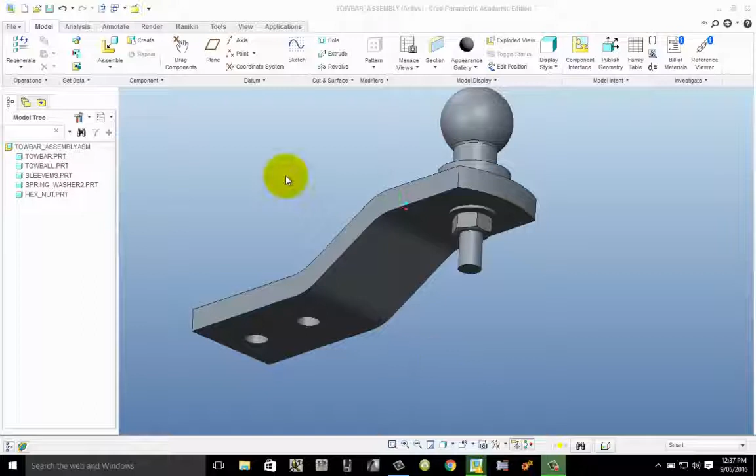So with that in mind, we can go to our assembly and follow the same procedure we normally do by bringing in the bracket. So we'll go find the bracket, there it is there, and open that.

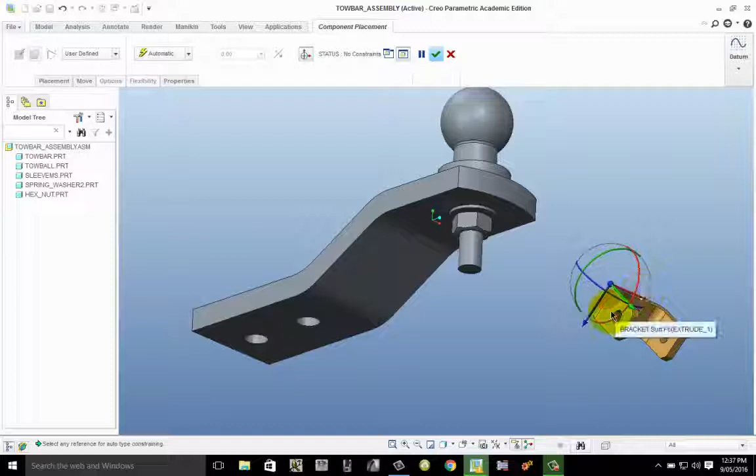It's always good practice to get your object roughly in the right sort of orientation before you start putting constraints on. So that's roughly in the right spot, so what I'll do now is select that surface and the underside, flat side of the bracket there.

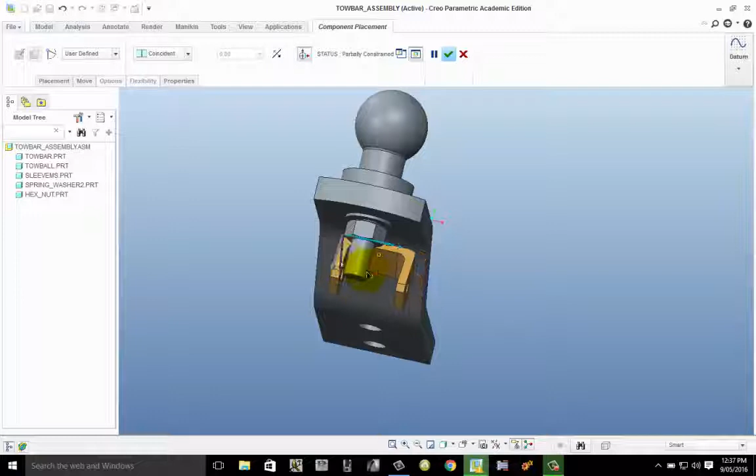It's defaulted to an angle, we don't want that, we want a coincident constraint, and we might then just use the coloured axial constraints here to bring it closer into the position we want it to be in. You can see here we can still move these around roughly into the right spot.

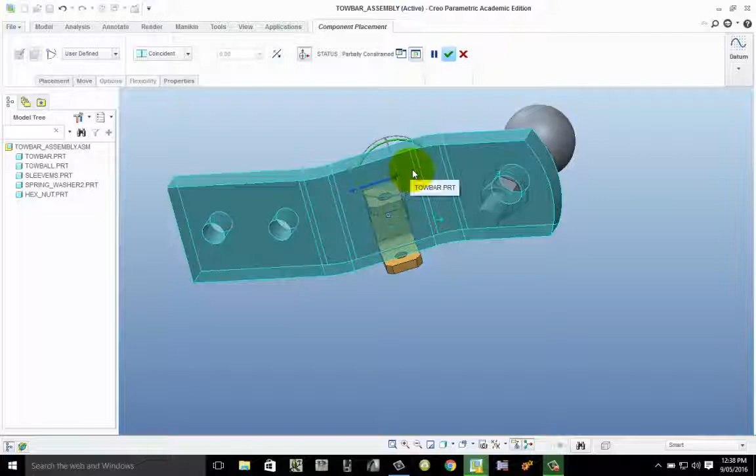So rather than just doing it roughly, let's make this precise. To make it precise, we really do need to know the distance between this edge of the curve and this edge, and make it halfway between those two points.

Then we'll make the faces out here, this tow bar face and these faces, the same distance away on both sides. So we'll do that constraint first.

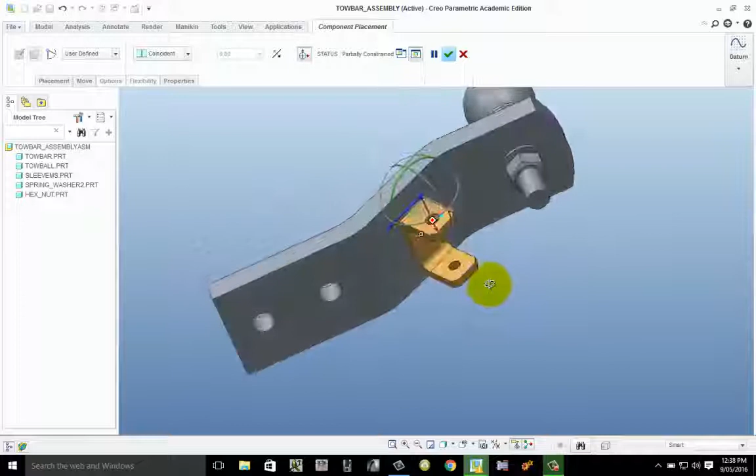So what we'll do, I'll show you how to use the analysis tool, which allows us to measure distances. So if you've forgotten, you can work it out. Up in the analysis tab here in the ribbon bar, click on analysis, come across to the measure tool, and while we're in the measure tool we can see all the different ways of measuring volumes, surface areas, you name it. The third one across is distance, so I'm just going to click on distance to activate it.

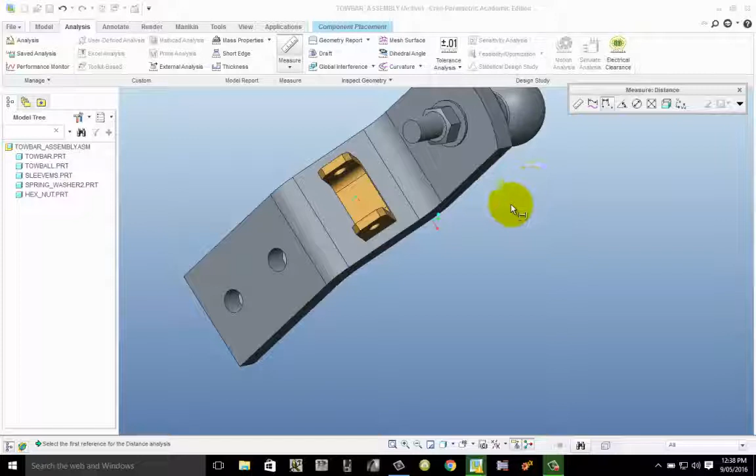If I wanted to know the distance, say from that edge there, hold down control, select the other edge, and it tells me that's exactly 75.

And then I could also do the same for the face and or the edge of the bracket. So I'll choose that edge there, hold down control once again to that edge there, that's 52.

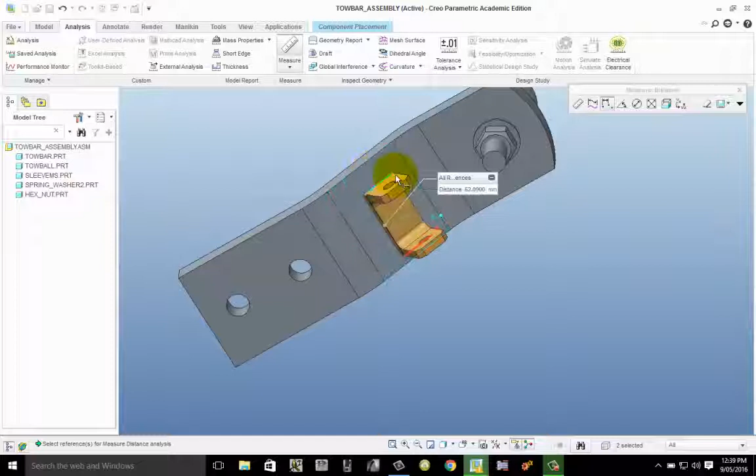So we say to ourselves, we want this to be evenly placed between, so if we take 75 minus 52, what's that, 23, and then we want an equal amount either side, so 23 divided by 2 gives me 11.5. So if I remember, I need 11.5 from that face to this face, we should be able to then constrain it to that.

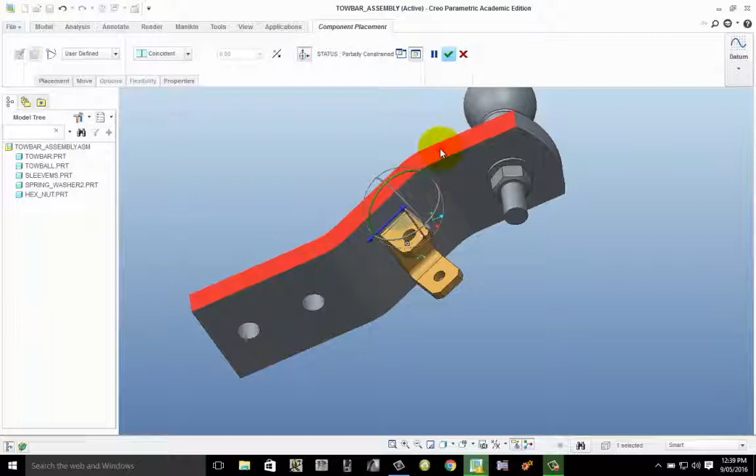Get out of the measuring tool by closing that box down, go back to the blue component placement box here. Then we can choose this outside surface here by clicking on the object once and then clicking onto the surface, and then we might zoom in a bit and see if I can get that outside surface of the...

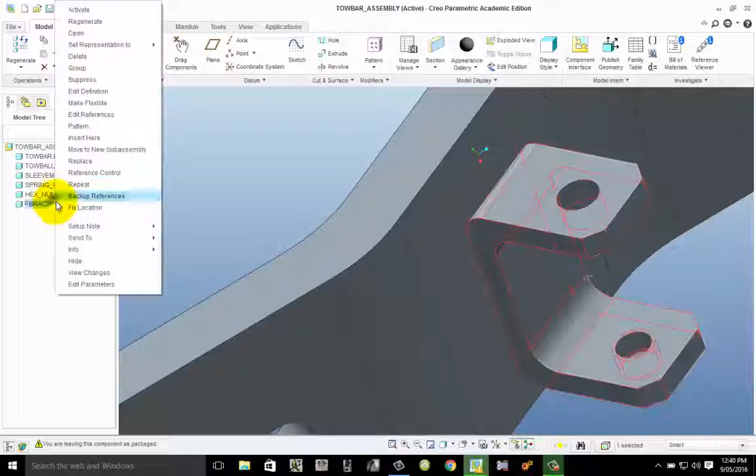That's not being very nice to me, of the bracket. I might just check out what's going on there. The stupid thing jumped out of mode again, so what I'll do, whoa, okay, it's doing something really crazy now. Let's cancel that, cancel that. A few issues with my mouse at the moment. Okay, we're back to the bracket, don't know what happened there. That was a bit bizarre.

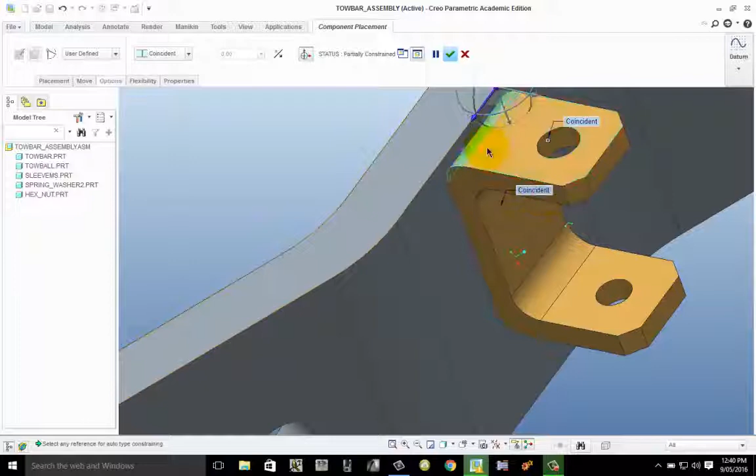Okay, so back to constraining these two faces here. Select this one, select that one, and always just, if you can, make it go in the direction you want it to go. So change it from coincident to distance, and we should be able to drag it along that axis. It's not being very nice, just keeps on defaulting to weird things. Try distance again.

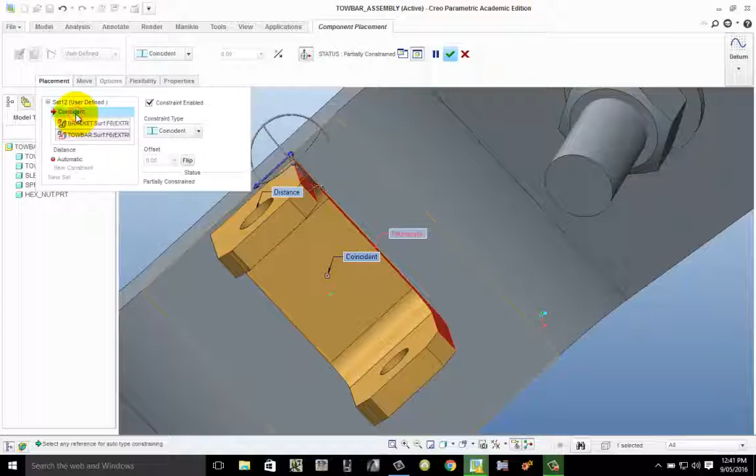Okay, that's not being very nice to us for some reason. Oh, it's lost its placement. Let me check what's going on here. There was a coincident constraint, then a distance constraint, and for some reason it put another one on. So I'm going to delete this last one by selecting it and clicking delete.

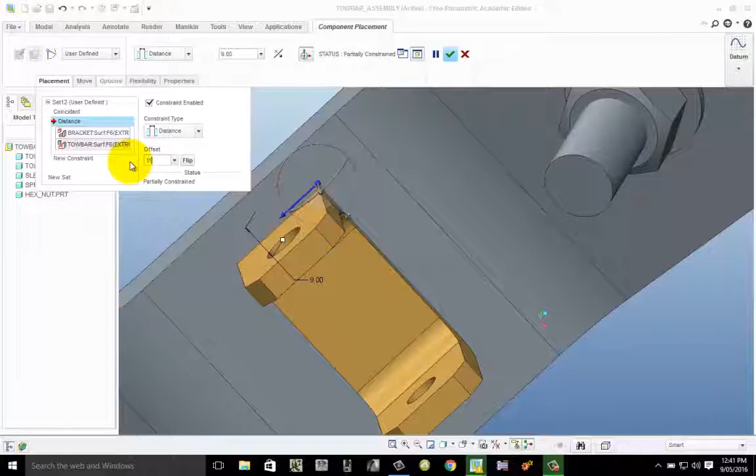Then I'm going to go back to this one. You can see here distance, there's two surfaces, and then I should be able to pull that aside, which I can. I'm going to change the distance from whatever it was to 11.5. That was a bit of a drama to do, but eventually we can now see that is mid-placed. So that's good, we like that one.

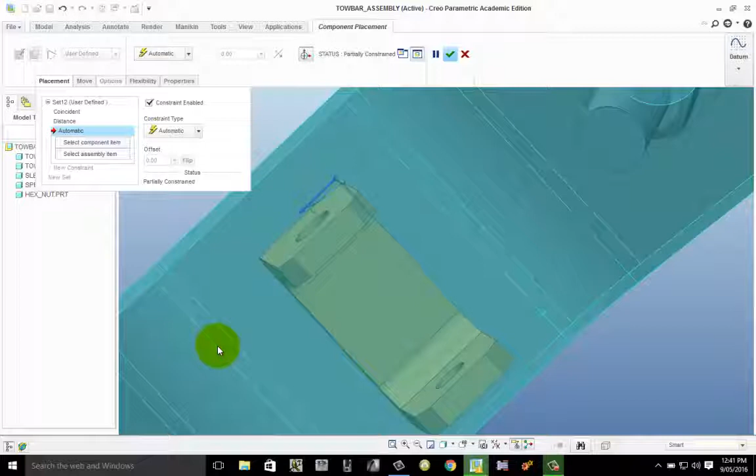So to go to the next constraint, we'll click on New Constraint. Now we need to make the distance between these two lines here, bends there and the bend there, equal distance as well. So while we're still in that process of assembly, we can go Analysis, Measure,

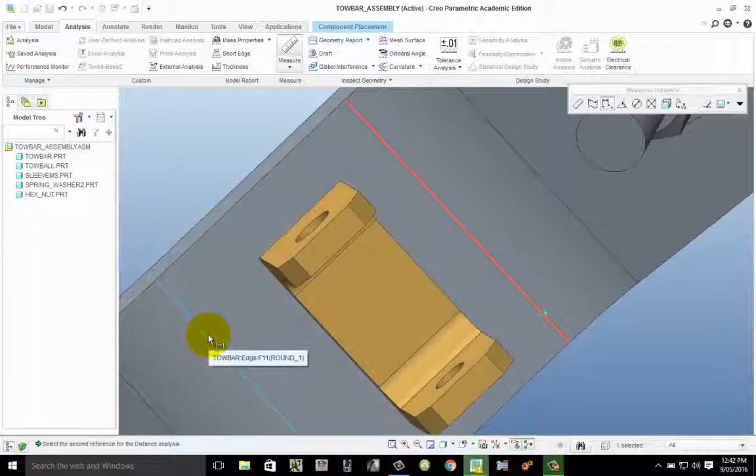Distance. I'm going to select that edge there, hold down Control, and also select that edge there. And it tells me that's roughly 58 millimeters.

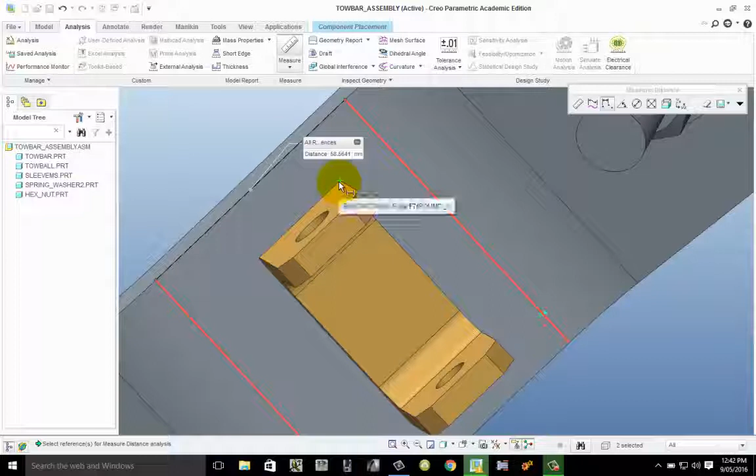So if that was 58 millimeters, and I know that the width of this bracket was 25, 58 minus 25 is 33. So if we said 33 millimeters left over, divide that by 2, that's 16 and a half. So 16 and a half millimeters then from that edge to that face there.

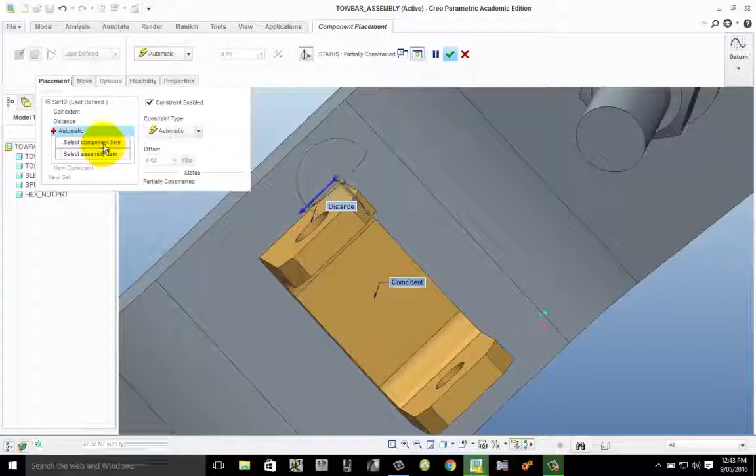So jump out of the measuring tool, close it down, and go back to our component placement mode, back to placement, make sure we see what's going on. Yes, so it's looking for some information, so what we'll do is we'll select that edge if we can. Now we'll just select the component first, might roll that over.

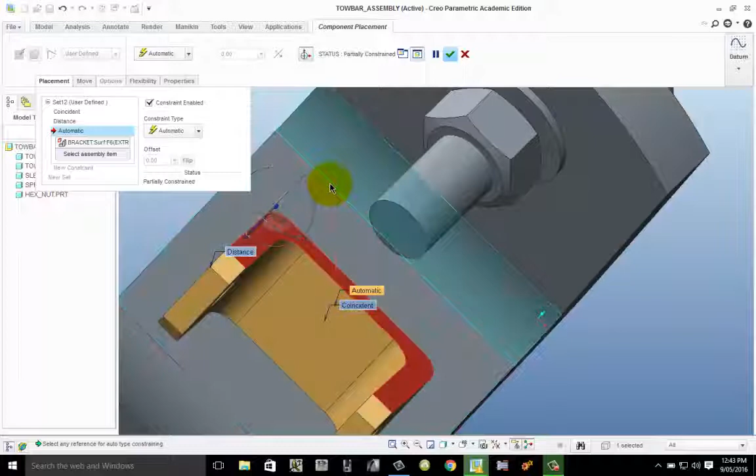That face there, you can see it's stored to. I'm going to right click until I get that edge, which I did, hold down Control - actually I shouldn't hit Control, just right click until I get the edge pre-highlighted, then left click, and you can see it's now stored it.

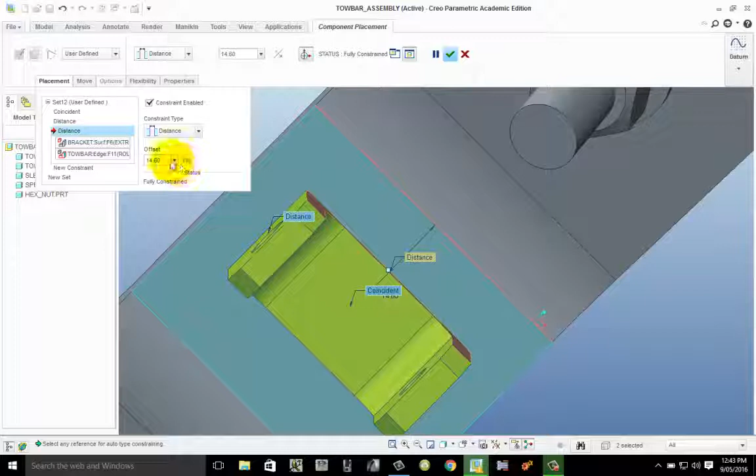Change it from coincident to distance, and then we need to offset that at a distance of, I think we said 16.5. So I'll just drag it that way so it kind of knows, and then 16.5 and enter. Let's have a look. It says fully constrained, looks like it's in the middle.

Good, we'll accept that. Oh goodness, jumped into rendering for some reason. Looks like it's still in the right spot though, which is good.

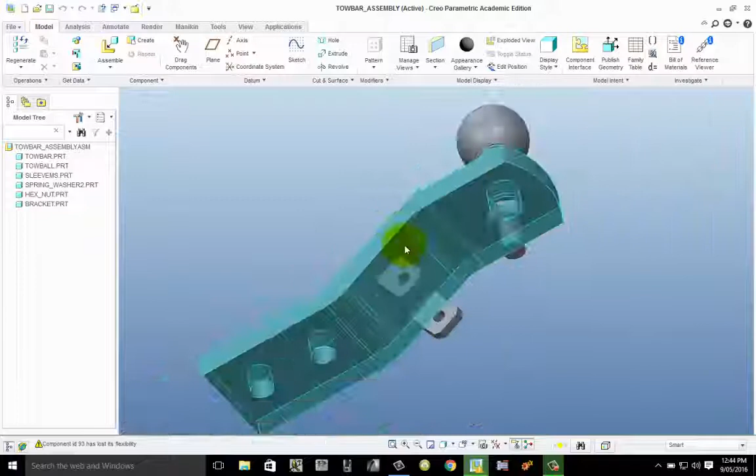And then the last thing to do is to bring in the bolt. So we'll do that by clicking on Assemble, go find the bolt, there it is there, click Open.

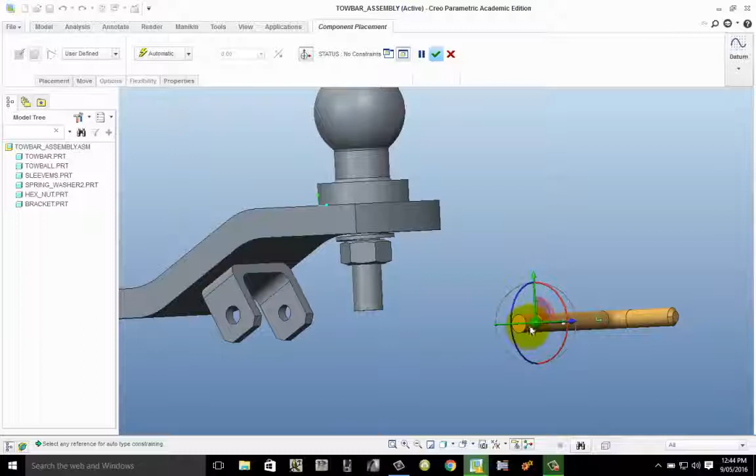What we've got to realize here is because we drew this bolt with a swept blend function, the only part we can use to really successfully assemble this is the cylindrical section on the end here. I know this is a threaded end, there's a cosmetic thread on there, and looking at my bracket I can see this is a wider hole than this one, which means this end must have the cosmetic thread on it.

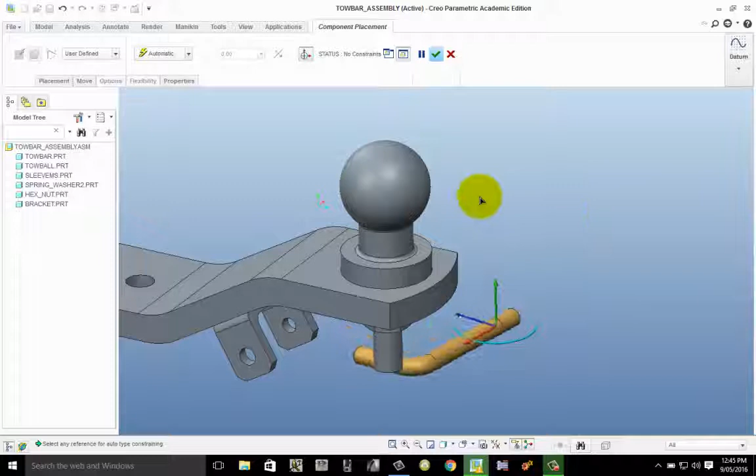If I actually hover there, you can see the blue line representing the thread. So this end is going to go to that end there. So what I might do first of all is see if I can spin this around to get it kind of in the right spot to start with. Right sort of orientation, that looks better.

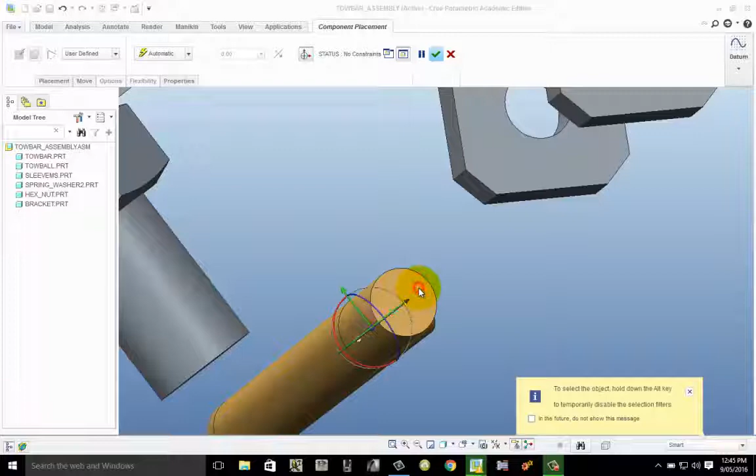And then what I might do is grab the surface on the end of the bracket, that one there, and then the surface on the end of the pin, not the bolt, sorry. Can't get that select for some reason, it's being a pain. I'll check my placements. Yeah, it should be accepting it. Try that again. There we go, eventually.

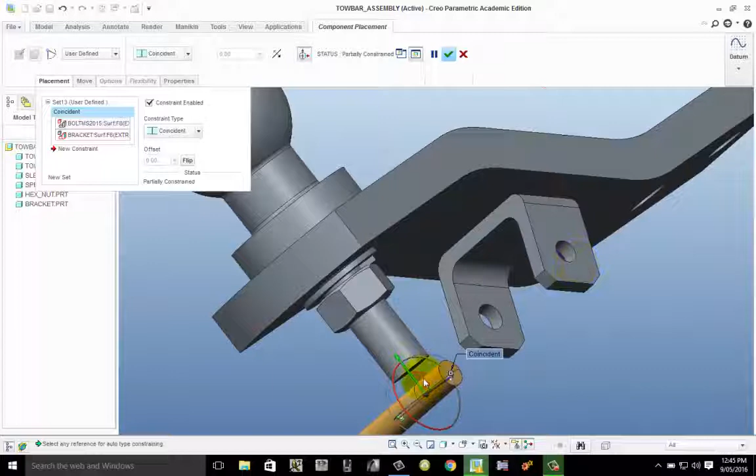Selected that one, and I want to make them coincident, which means you can see it's lined up there. And then we grab the outside cylindrical surface - or new constraint first - outside cylindrical surface there, inside cylinder there, and that's coincident as well. And it's fully constrained. Okay.

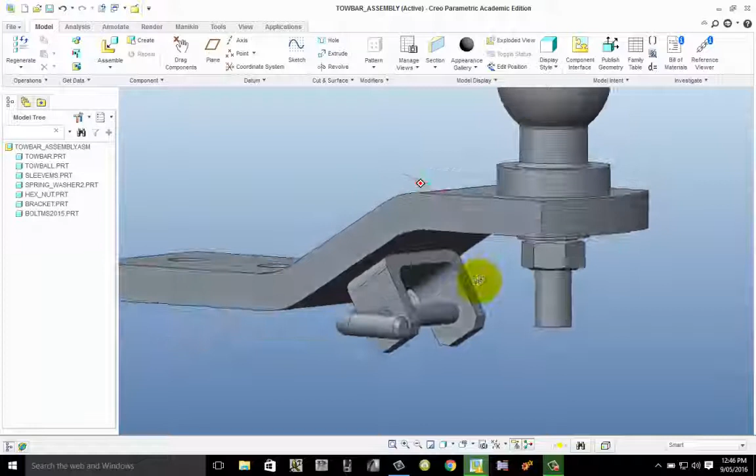Alright, so dealing with parts that are being created with different methods can sometimes be quite difficult, and if you understand that placement tab within the constraints or within assembly, it's going to make life a lot easier for you. So good luck with that, and I suppose we can then from there start create our assembly drawings.